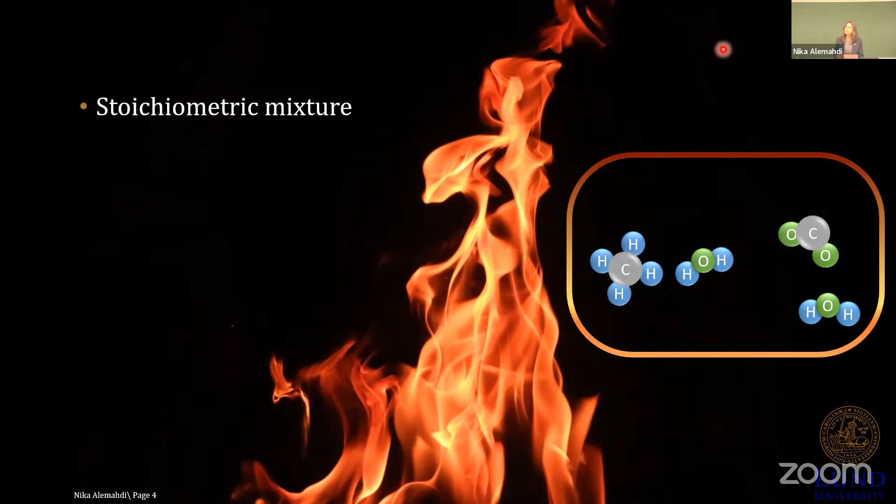The ratio of fuel to air is described using the fuel-air equivalence ratio, or phi, which is included in the title of my thesis. The fuel-air equivalence ratio is the actual ratio of fuel to air inside the combustion chamber, divided by the ratio of fuel to air in the stoichiometric mixture of that specific fuel.

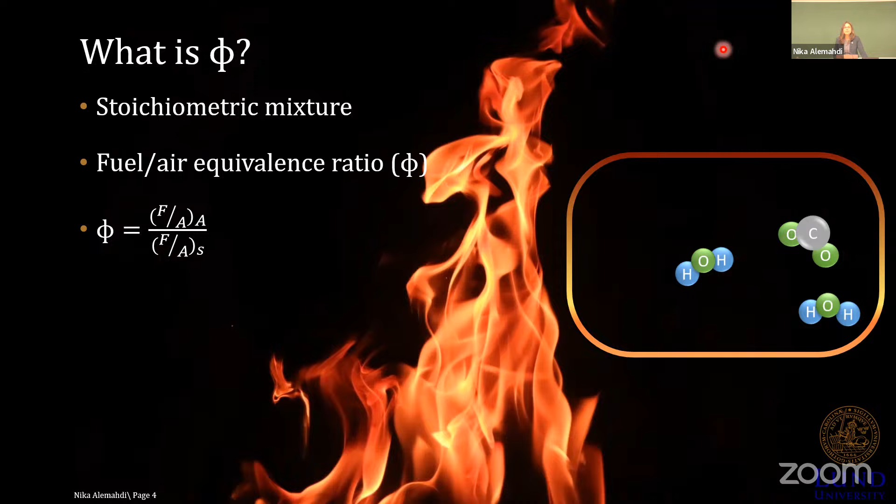Using fuel or fire, human beings have damaged and transformed nature a lot. But the effect of fire on the environment is not the only thing we as humans have done to nature.

Our beautiful planet has 9 health indicators, so-called planetary boundaries. Those are something like blood pressure or body temperature for us humans, to make sure that we are healthy or not.

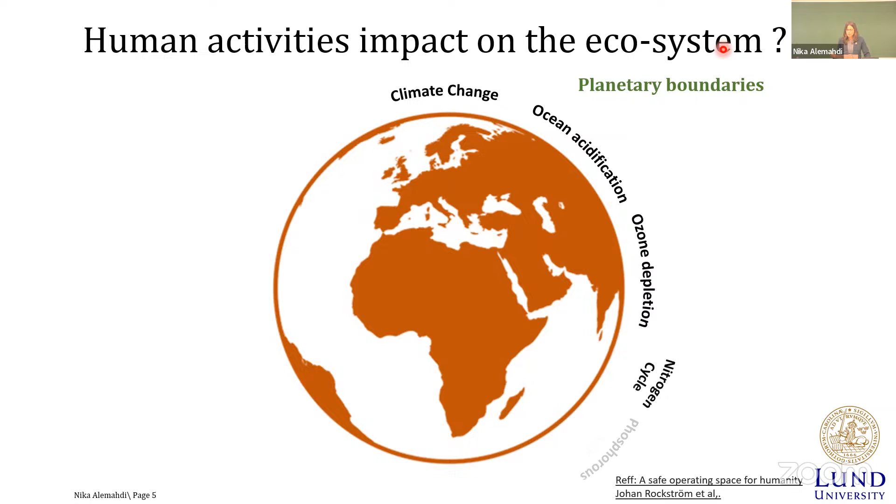I'm sure you have heard of climate change, which is the most famous planetary boundary. And of course we have the rest also here. We have 5 different levels for those planetary boundaries.

The first 2 are the safe levels. It means if changes happen during the first 2 levels, the ecosystem and the planet can adapt to the change and doesn't get sick. But if the damage exceeds these first 2 levels, the ecosystem and the planet will feel ill, and it's not a normal ecosystem anymore.

All human activities, from agriculture to burning fossil fuels and mining, are contributing to damaging the ecosystem and pushing all of those planetary boundaries to their thresholds.

If I take a simple example, like the transport sector's contribution to climate change: we are burning fossil fuels, mining for rare battery elements, and even building infrastructure for transportation. All of those activities are pushing climate change to the threshold and making the planet sick.

But would it be possible to decrease the damage that our activities are putting on the planet and its planetary boundaries? Or would it be possible to at least maintain our activities within a safe zone that would damage the planet less? How will it be possible, how can we damage less, and which zone would be safe for us to be active in, safe for both humans and the planet?

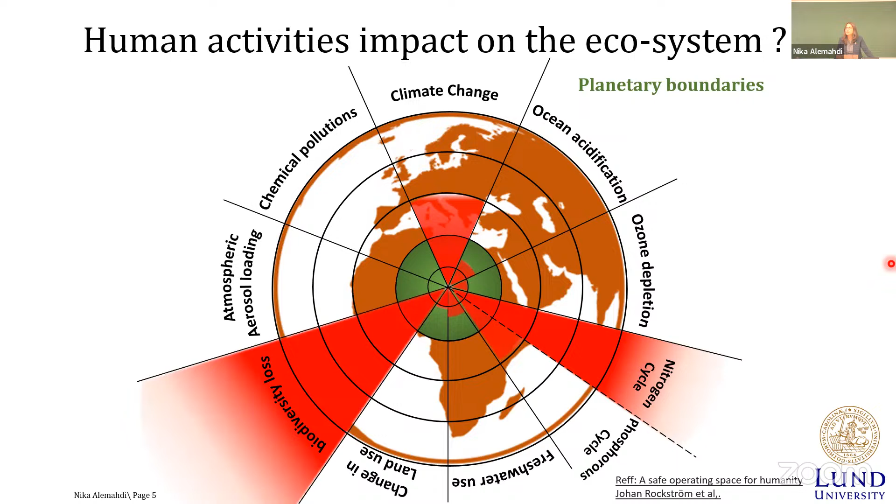Yes, actually there is a safe zone, and we can decrease these damages and keep it within a safe zone for both the planet and humans. And this safe zone is actually here within a donut.

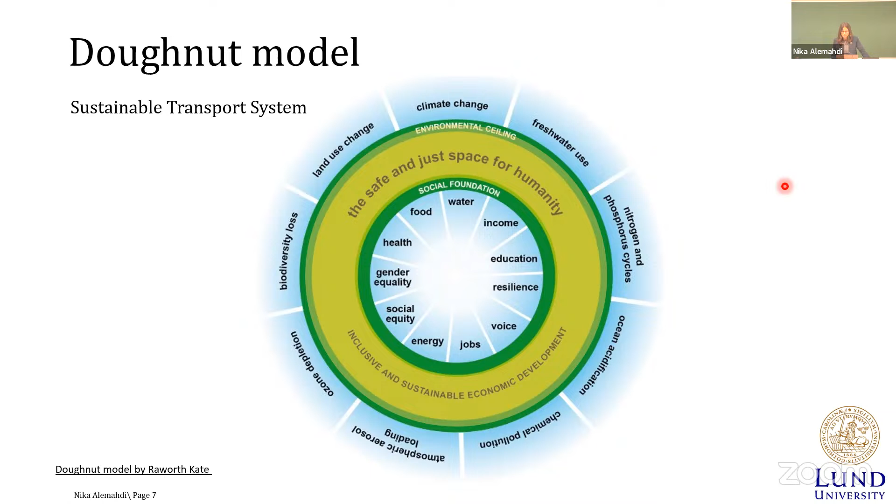Let's start with what I have learned. I knew that resilience is vital for any sustainable system, and diversity is a key factor for resilience. When it comes to passenger cars, diversity means we must have a fleet with different kinds of powertrains.

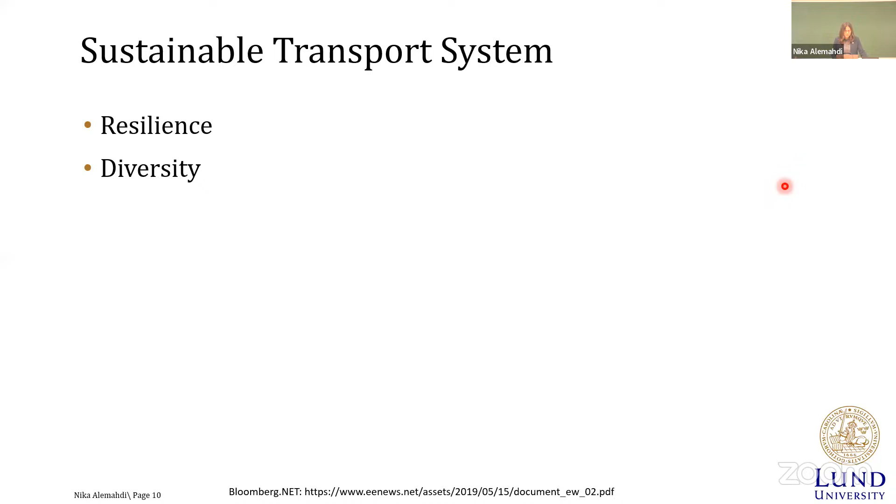I believe that with such a significant share in future transportation, internal combustion engine technology has the potential to be used as an enabler for a sustainable transport system, helping us transition towards sustainable transport.

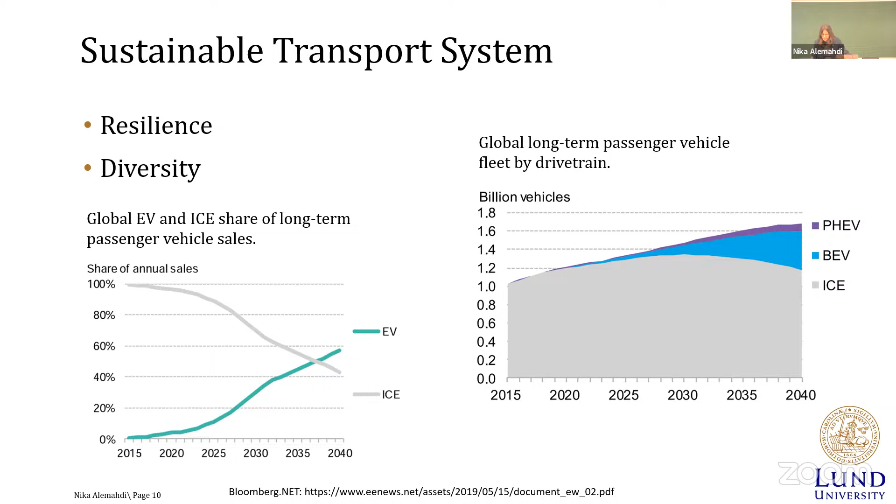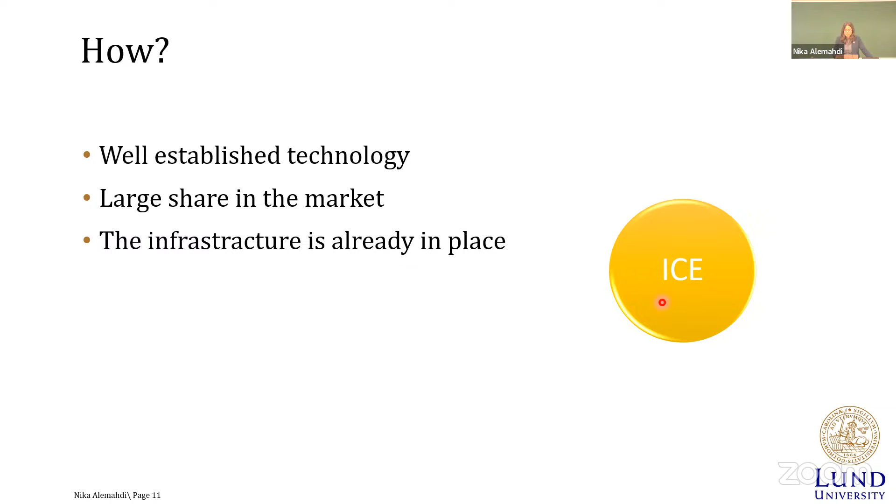But how should we use the internal combustion engine as an enabler? We know that internal combustion engine is a well-established technology, and we saw in the previous slide that it has a large share in the market. We also have the infrastructure already in place. But there are also some small challenges, like we need to increase the efficiency of internal combustion engine further. We need to decrease the emissions, and we need to replace fossil fuels with renewable fuels.

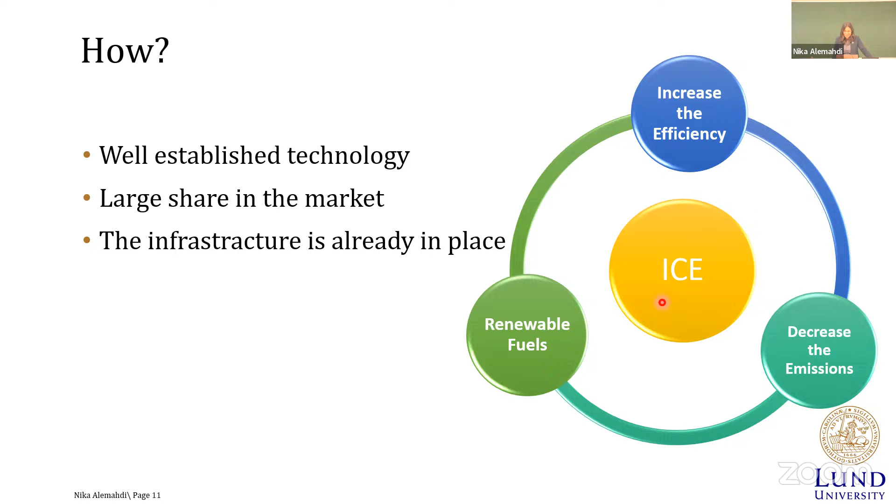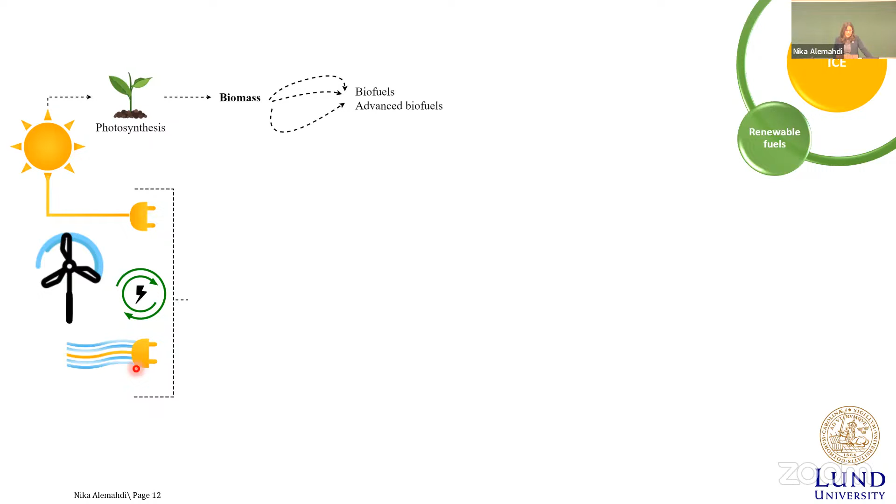Let us start with renewable fuels. Directly from sun, here we have biomass. And from biomass, using different pathways that sometimes are not that simple, we can produce biofuel and advanced biofuels. The other way is using electricity directly, and using different pathways that are sometimes complex and not always straightforward, we produce electrofuels or advanced biofuels.

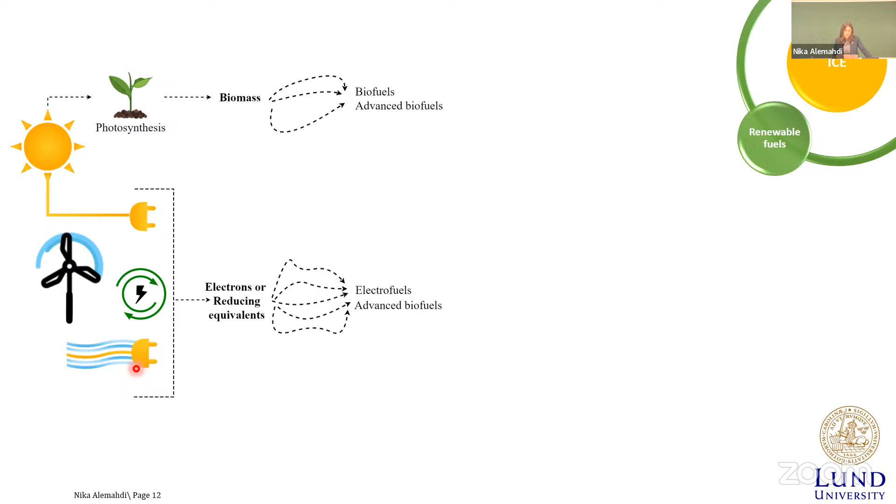I have an interesting plot here, from McKinsey Global Energy Perspective. This graph talks about different scenarios about future demand of sustainable liquid fuels. The main scenario that I want to talk about is this one. This scenario basically says that if we aim to maintain the temperature increase of the planet below 1.5, based on the Paris Agreement, then we need to increase the share of sustainable fuel in the energy sector up to 40%. Then sustainable fuel or biofuel is not just an option anymore or a maybe, it's a must.

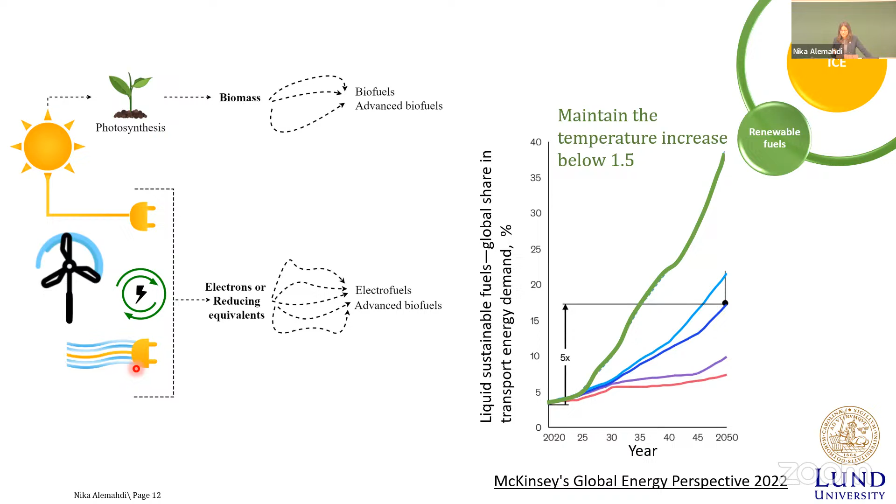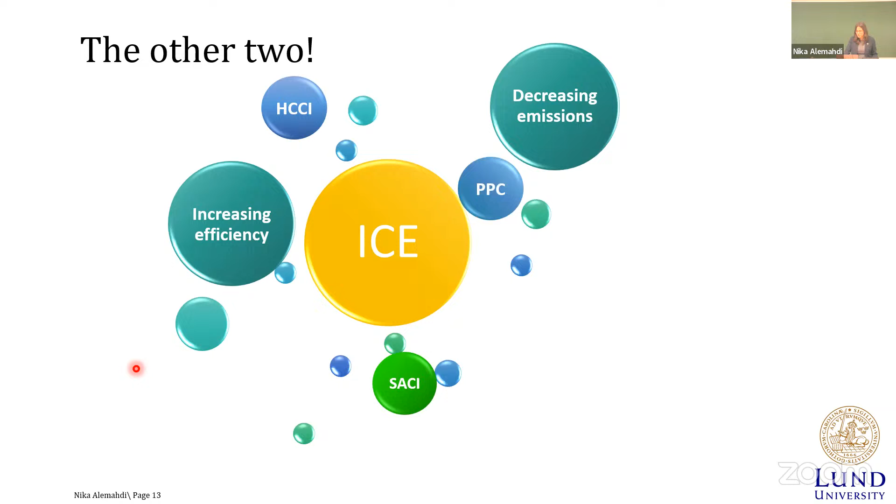But what about the other two? We need to decrease the emissions and we need to increase the efficiency. We have some combustion technologies that have these two properties, something like homogeneous charge compression ignition engines, spark assisted compression ignition engines, or partially premixed combustion engines. All of those technologies are working based on a concept called LTC, low temperature combustion concept.

Low temperature combustion concept is interesting because it has low emission and high efficiency, but it also has some drawbacks. As an example, it has a high pressure and low temperature of unburned gas. Therefore, we cannot use the conventional test methods like RON or octane rating for the fuel that we want to use for LTC. They don't work there anymore.

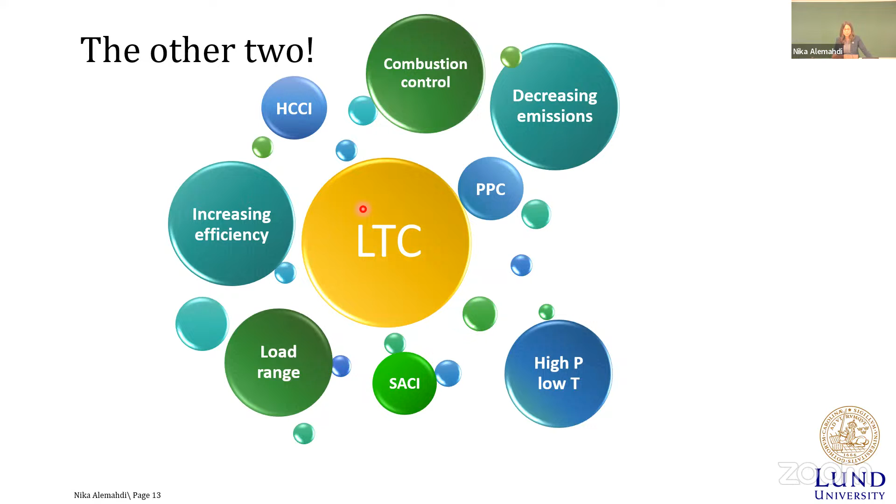Some of the LTC concepts or technologies also have a really limited load range, like HCCI. And we also face some controllability problems when we work with the LTC concept.

But these concepts and technologies are very sensitive to variation of phi, meaning variation of fuel to air ratio. They are sensitive if you add more fuel or less fuel. Being sensitive to variation of phi means that different fuels with the same RON number can still have different phi sensitivity and can have different responses in LTC combustion. This is another reason that we cannot use the conventional test method for evaluating fuel for low temperature combustion.

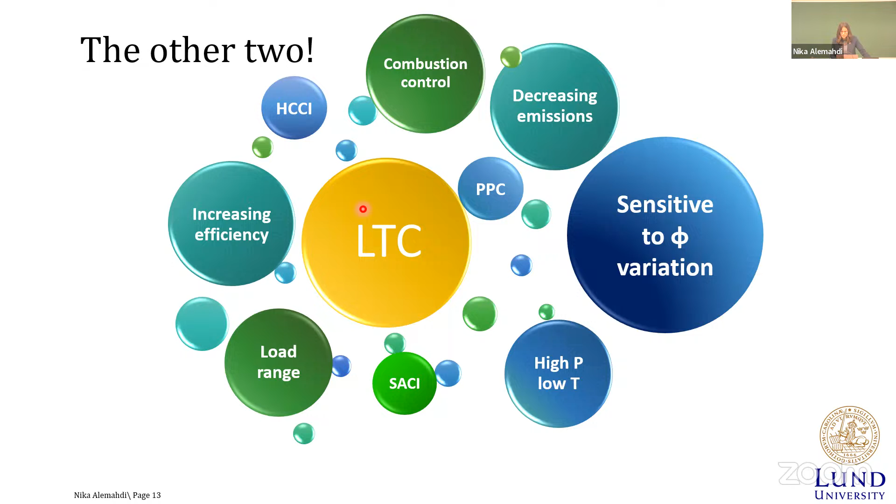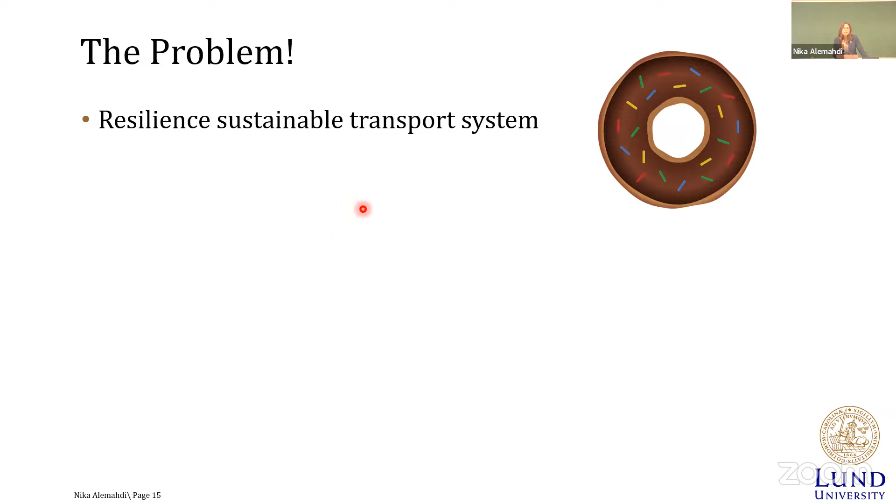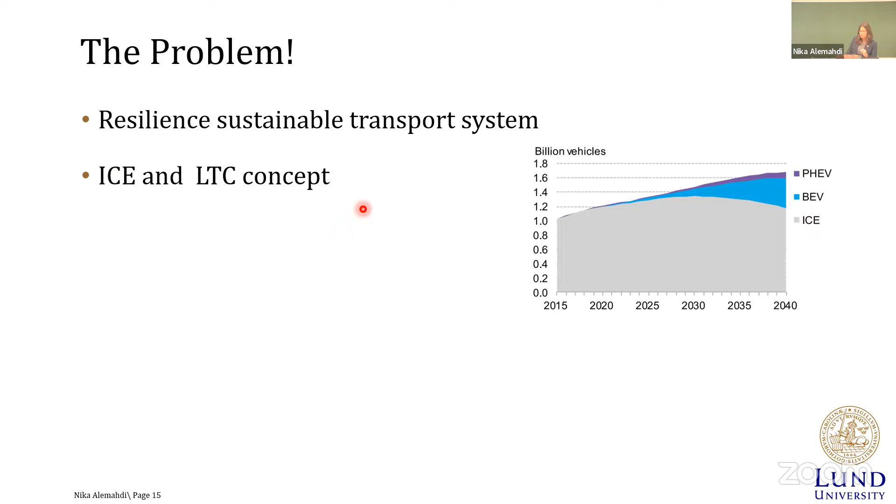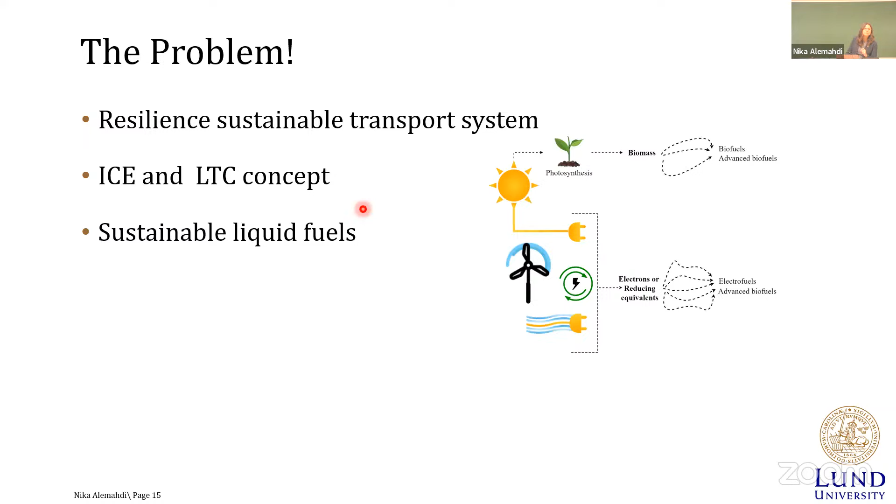But what was the problem? If I want to summarize the problem, cut the long story short: I knew that we need a sustainable, resilient transport system. I knew that we have internal combustion engine well established, already in place, with a large share in the future. We have LTC combustion as a low emission, high efficiency combustion concept with some problems. I also knew that we need sustainable liquid fuel in the future, and it's a must. So probably we will have that in place.

But the problem was how we should feed this new fuel that we have to the new combustion concepts that we have, because we don't have a good method, or an appropriate test method, to evaluate if it fits or not.

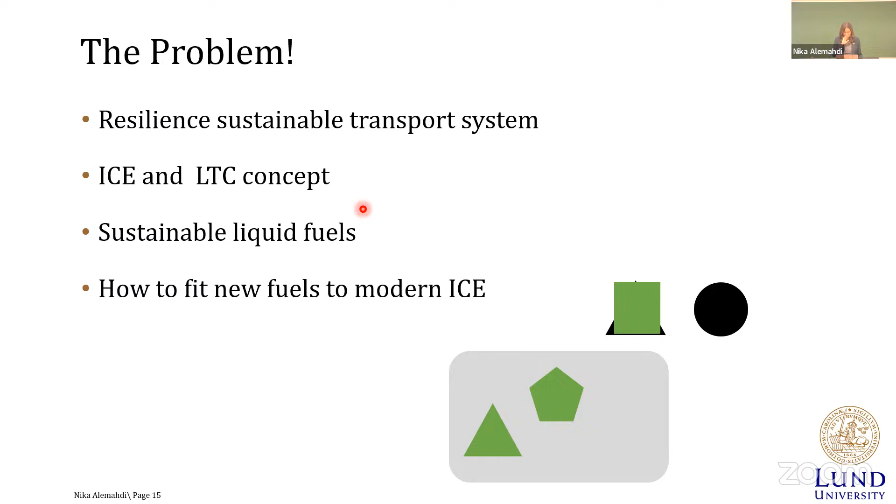Then to tailor fuel for LTC engines, we need a test method that can evaluate combustion response to different kinds of stratification, both fuel stratification and temperature stratification. The method also needs to be standard, so it should be possible for refineries or fuel producing industries to use that method. It should be rather technically simple, and it shouldn't be dependent on complex prerequisite data such as kinetic mechanisms, because those are not always available.

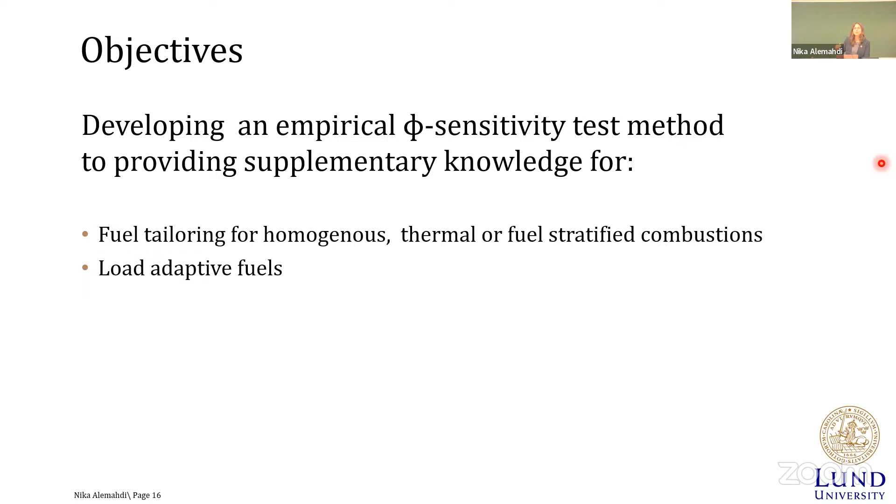And I believe that if we can develop such a method, it can support the transition of the transport sector towards sustainability by providing supplementary knowledge for tailoring fuel, preparing fuel for homogeneous modern combustion, thermal or fuel stratified combustions, and also load adaptive fuels—the kind of fuel that can tolerate different kinds of load with minimum combustion instability based on the combustion concepts.

And then this method may also give us some information about how to design a controller strategy for low temperature combustion, and also give us valuable information about knock resistance evaluation of fuel for SI engines.

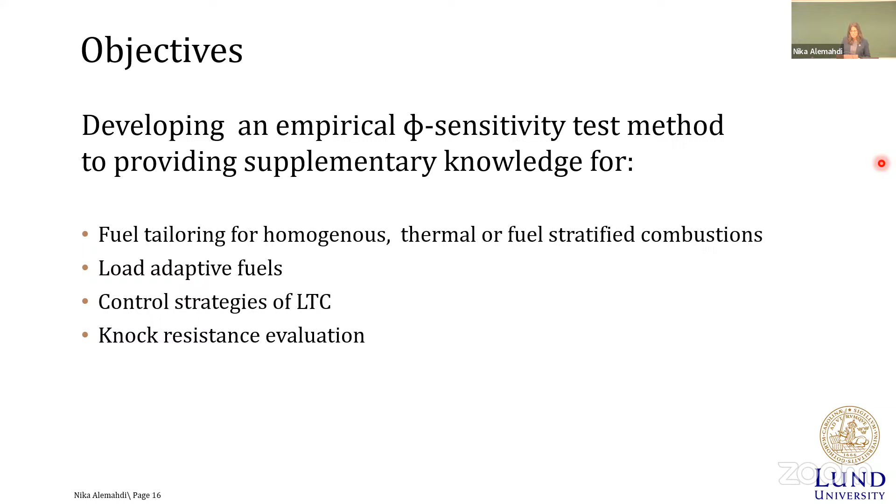But what did I have?

Yeah, I had access to this beautiful engineering masterpiece, an adorable CFR engine. This is a standard test engine, not one you see normally on a car. It was developed long ago for determining the octane rating of fuel.

Because it has variable compression ratio, it's versatile for burning almost every liquid fuel. The CFR engine we had in Lund is normally equipped with a spark plug and is a spark ignition engine. But at Lund University, we modified this engine for HCCI combustion because we wanted to do auto-ignition studies.

You see some of the specifications of the engine here. It is a single cylinder engine, and it has variable compression ratio from 4 to 18. These are, I think, the most interesting things about this engine, but we have modified it for HCCI combustion.

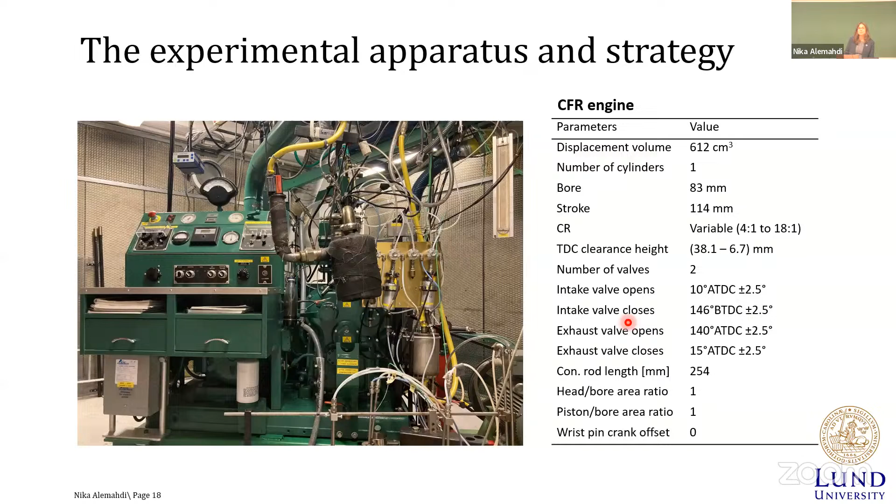But what is exactly HCCI combustion? Homogeneous charge compression ignition is a combustion technology that works based on a low temperature combustion concept. Inside the combustion chamber of an HCCI engine, we have an almost homogeneous mixture of fuel and air. It is like SI up to here, but then we don't have a spark plug.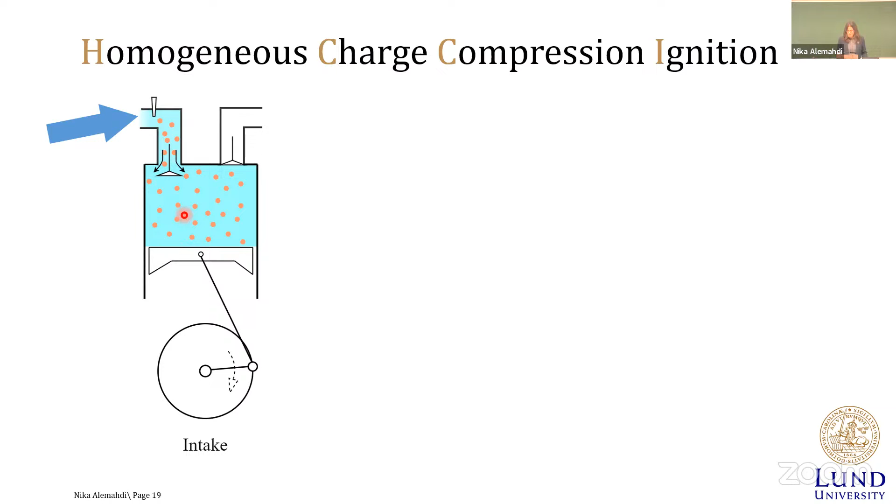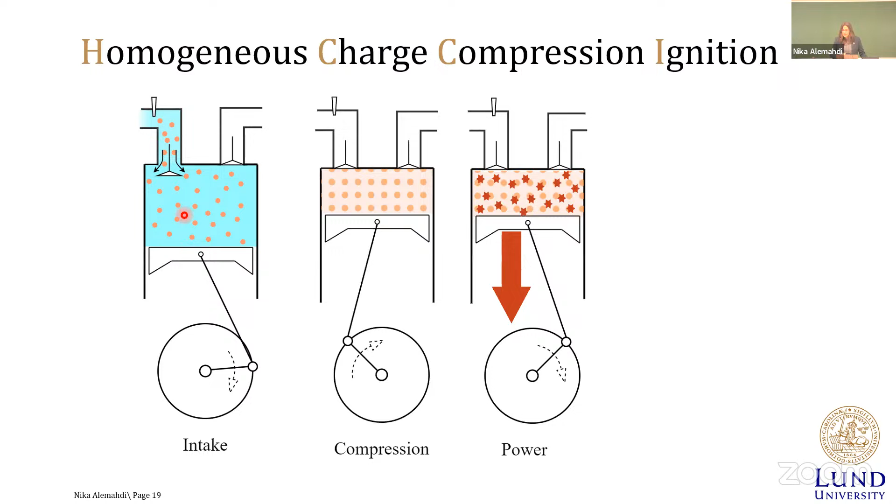But how do we burn it then? We compress a mixture of fuel and air to the point that it heats up and auto-ignites. Spontaneous auto-ignition starts throughout the whole cylinder in sequence, not all at once, and generates power. Then, like any other engine, we push the exhaust gas out. This is how HCCI technology works.

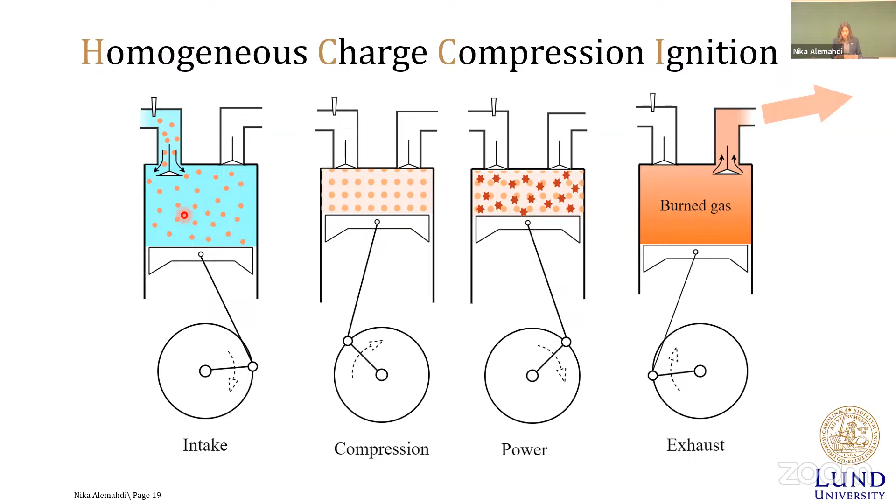Let's come back to the test cell. In the test cell, as I explained, I had this masterpiece, and I also had a sample line to the HORIBA emission analyzer for measuring different emissions, and also calculating phi, lambda, and oxygen from the emissions.

I also had a data sample line to a data acquisition system, to take readings from different sensors and measure and save different parameters of the engine for post-processing.

The general strategy of my research, my experiment, was that I had 3 different intake temperatures: one 50 degrees Celsius close to RON measurement temperature, 150 close to MON temperature, and one in the middle.

And then the intake pressure was ambient. The coolant temperature was set based on RON and MON, because I'm using the CFR engine, which is designed for this method, so to keep it standard. For different experimental campaigns, I had the CA50 constant at different levels, like 3, 6, and 8, and compression ratio was variable.

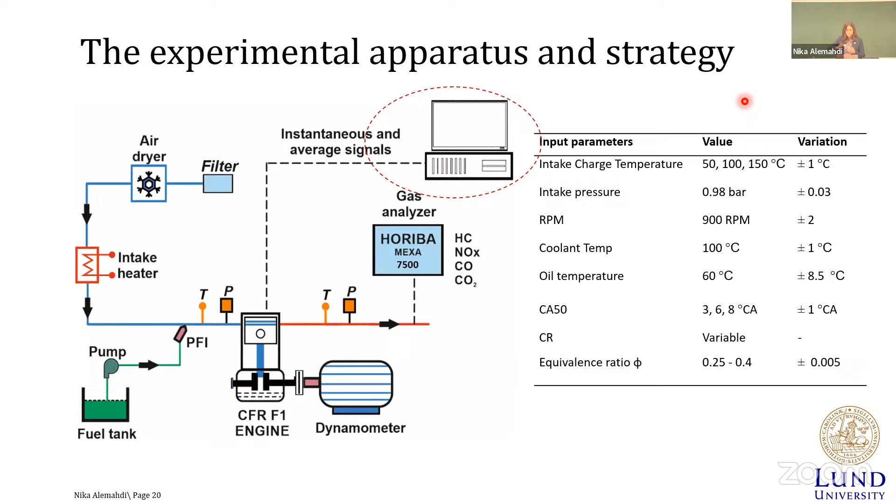Then, after selecting that criteria, I evaluated the method using some extreme fuels. I will talk later about what I mean by extreme fuels.

Then, when I got the results or data, I checked if they are sensitive. It means, if I change the phi, do I really see any changes in the result parameters or not? Is it consistent? How much is the error? Can we rely on this data?

If we do the experiment on different days, do we get the same result? Is it transferable? Can we use this method for designing fuel for a conventional engine? Would it be possible to benefit from this result in a conventional engine? Because, as I told you, the CFR engine is a test engine.

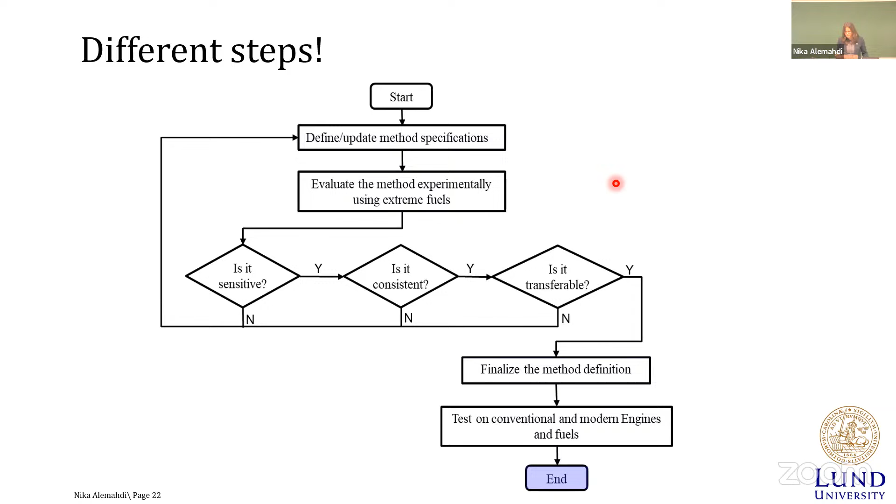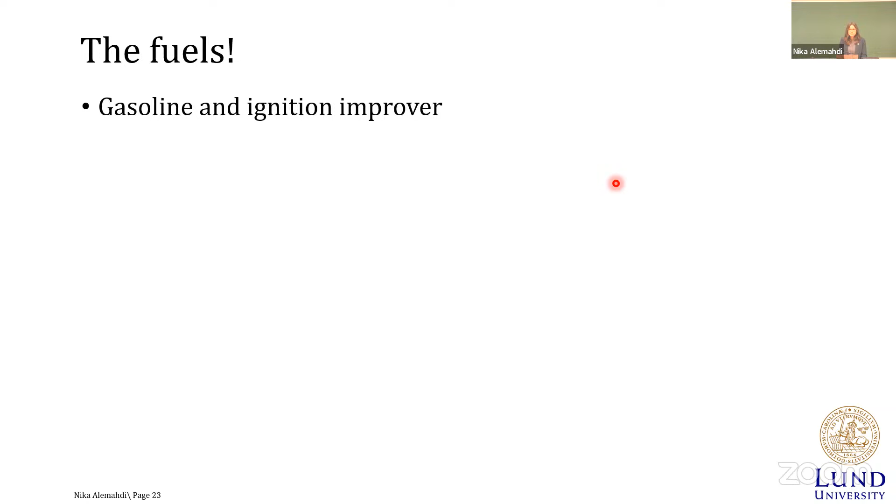But what kind of fuel have I used? For preliminary studies, I used gasoline and ignition improver. I also used different reference fuels at 3 different RON groups of 63, 84, and 105 octane number. These are the extreme fuels that I will talk about more. I also tested neat ethanol, neat isobutanol, and neat N-butanol.

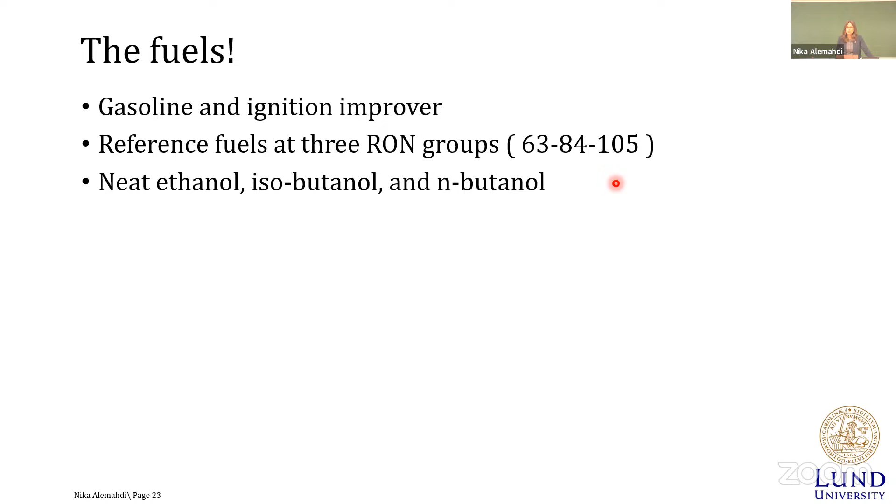I also evaluated the blend of isobutanol with the reference fuel. But let's just have a closer look at the extreme fuels.

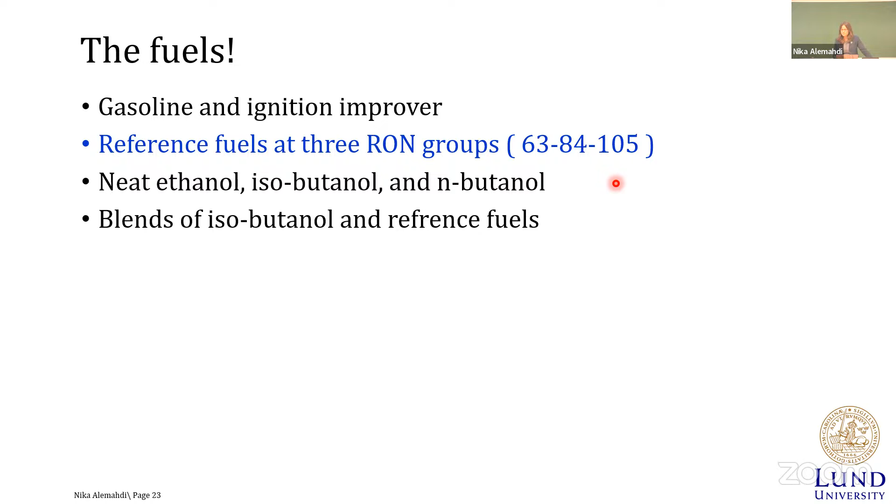Here you can see the fuel matrix that I developed for my experiment. I had these 3 base fuels. I selected these 3 base fuels first: ethanol, the highest RON number and highest oxygen concentration, no aromatic; PRF 84, a middle RON fuel; and PRF 63, a very low RON fuel.

Based on those baselines of octane number, because I wanted to isolate the effect of octane number from Phi, it was important for me to have fuel in each group with the same RON number but different composition. In each group, I had fuel with toluene (aromatic), ethanol (oxygenate), and isooctane and N-heptane. I also had a fuel with no aromatic, only oxygenates, isooctane and N-heptane. And lastly, a fuel with toluene but no ethanol, with high concentration of aromatics but no oxygenates.

But how did I do it? We had an in-house model developed by Solaka Aronsson et al. You can see the link here. First, I estimated the volumes needed to achieve such a RON number using the model. And because models always have uncertainty, I sent it to the Saybolt company to measure the exact RON and MON number for me.

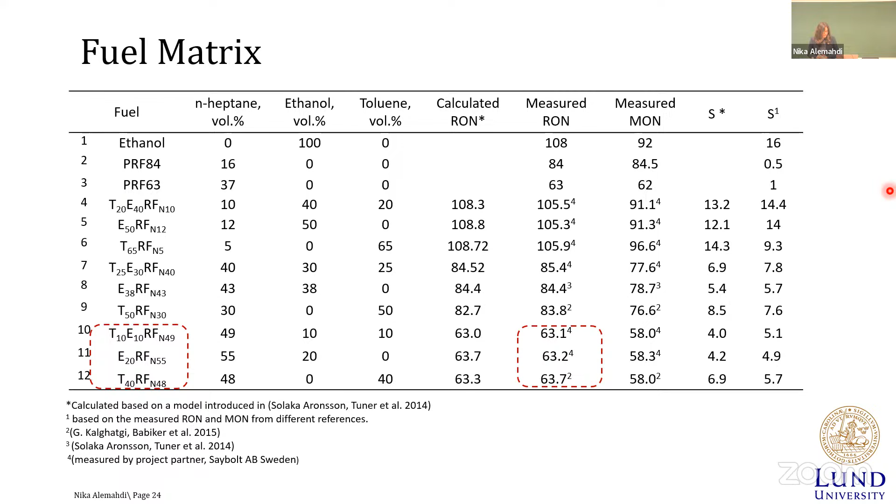I'm not the first one who has worked on Phi sensitivity, and I think I will not be the last one either. From the literature review, I learned a lot about Phi sensitivity.

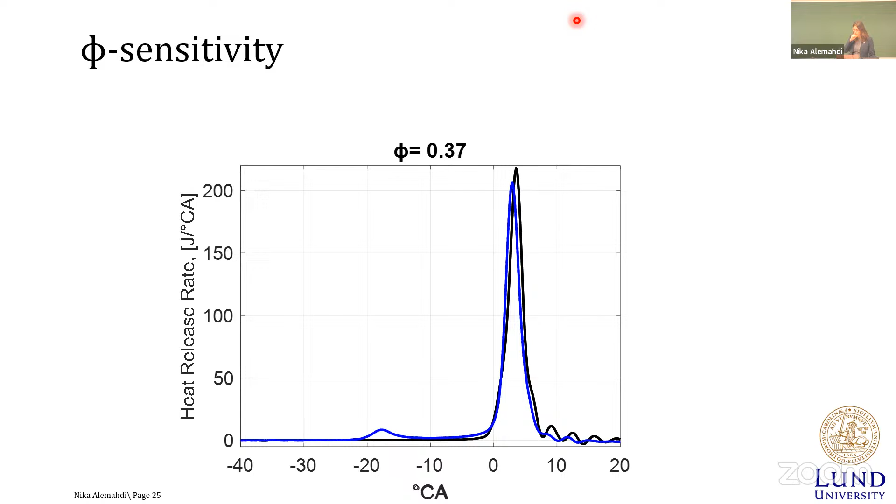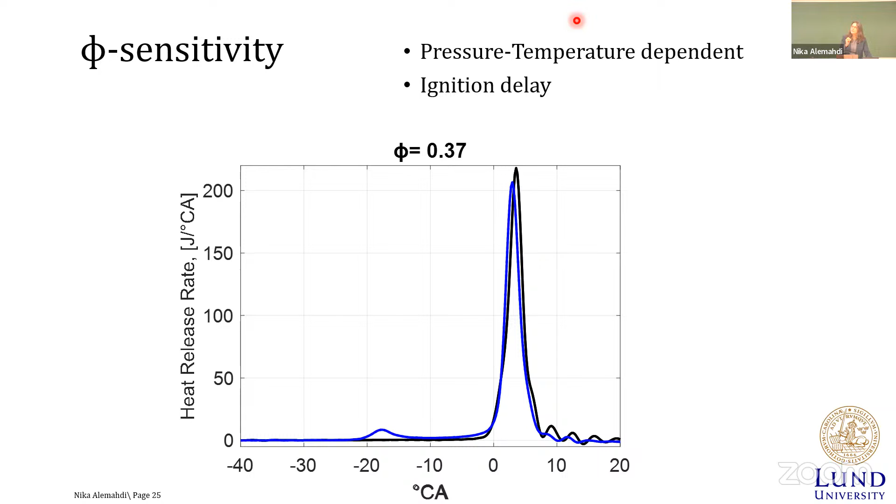I learned that Phi sensitivity is strongly dependent on the pressure and temperature inside the combustion chamber. I also learned that the fuel-air mixture with different equivalence ratios will show different ignition delay when we burn them in a combustion engine.

I also learned that heat release during the early reaction is an indicator of Phi sensitivity, meaning that a fuel with higher Phi sensitivity will probably also exhibit more heat release during the early reactions. There are some terms I think I need to clarify, like ignition delay, heat release, early reaction, and so on. So let's start with those clarifications first.

Here what you see is two heat release profiles for two different fuels. The black one is single stage combustion, and the blue one is two-stage combustion, both at the same Phi level.

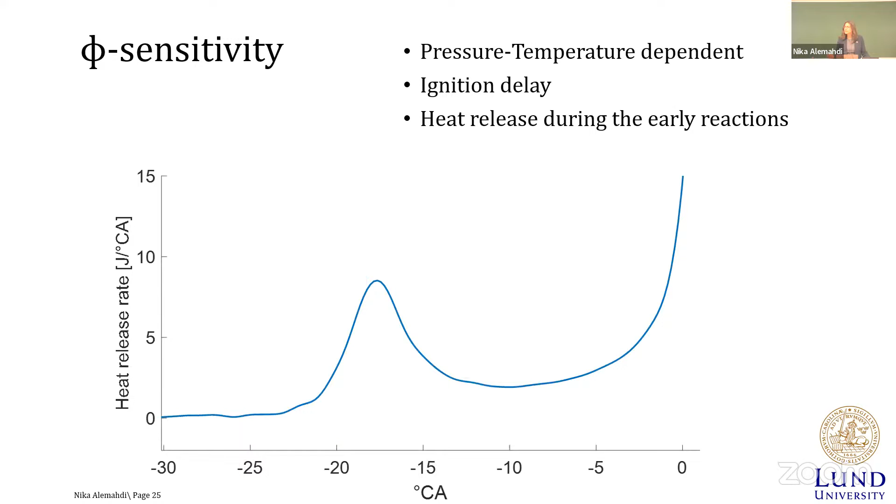If I zoom in to the low temperature reactions, or early reactions, let's start with this two-stage combustion. We need to define the start of autoignition. Based on my research and literature study, I selected 0.2 joule per CAD for start of autoignition, and 5 joule per CAD for start of main combustion.

Here, the bump that you see is the low temperature reaction. And the top of this bump, and the minimum of the low temperature reaction here - this gap is called NTC. The NTC zone is a zone where temperature keeps increasing, but less and less fuel burns. This minimum point here, the end of the NTC zone, would be the start of intermediate temperature heat release.

From start of autoignition to start of low temperature heat release, we have low temperature heat release and low temperature reactions. From start of intermediate temperature heat release to start of main combustion, we have intermediate reactions that also release intermediate heat. From start of autoignition to start of main combustion, we have ignition delay - the definition of ignition delay that I used in my work.

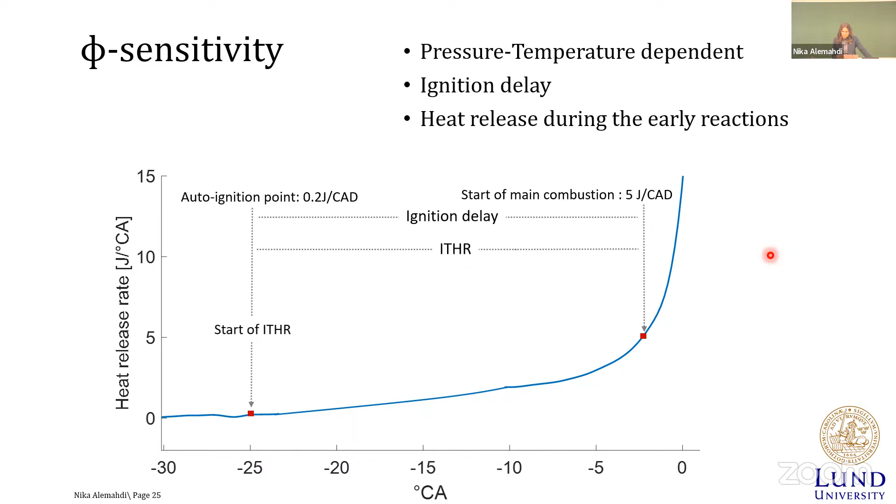Now we know the definitions that I have in my work. Let's continue with the bullet point. The first thing was pressure temperature dependency of phi sensitivity.

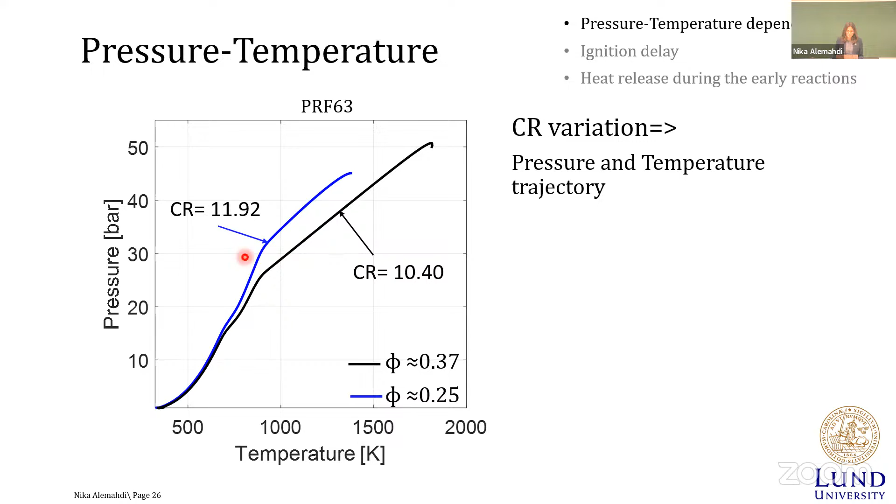Here we have pressure temperature trajectory graph for PRF63 at two different phi levels. You see that we also have different compression ratio. And by varying the compression ratio in the CFR engine, the temperature pressure trajectory prior to autoignition and generally inside the combustion chamber changes. Since we have different pressure temperature regimes when we change the compression ratio, and since HCCI combustion is kinetic driven, it is sensitive to this variation of compression ratio.

Therefore, by adjusting or changing the compression ratio in a CFR engine, we are changing the onset of different phases of combustion inside HCCI combustion.

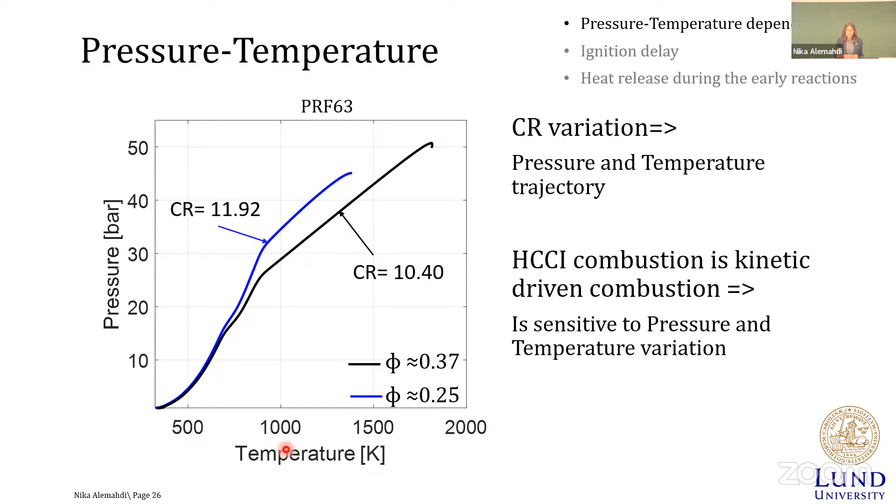But what about ignition delay? Here we have the early reaction part of PRF63 at different phi levels. We see there also different compression ratio. This is only one example of the data that I have.

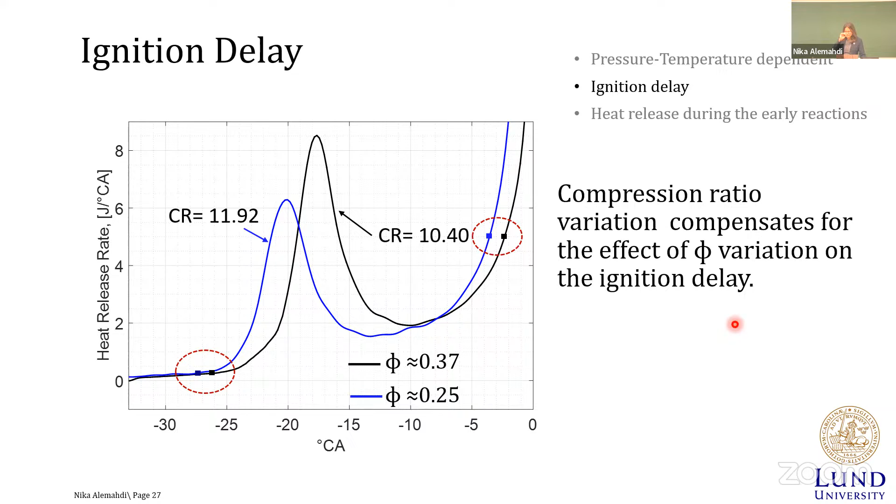I have adjusted compression ratio to maintain CA50 constant, and it seems that adjustment of compression ratio to maintain CA50 constant also kept the ignition delay constant. So it means that it compensates for the impact of phi variation on ignition delay.

You see that we have almost the same ignition delay at different compression ratios at different phi, because when I was changing the phi, I adjusted the compression ratio to have a constant combustion phase.

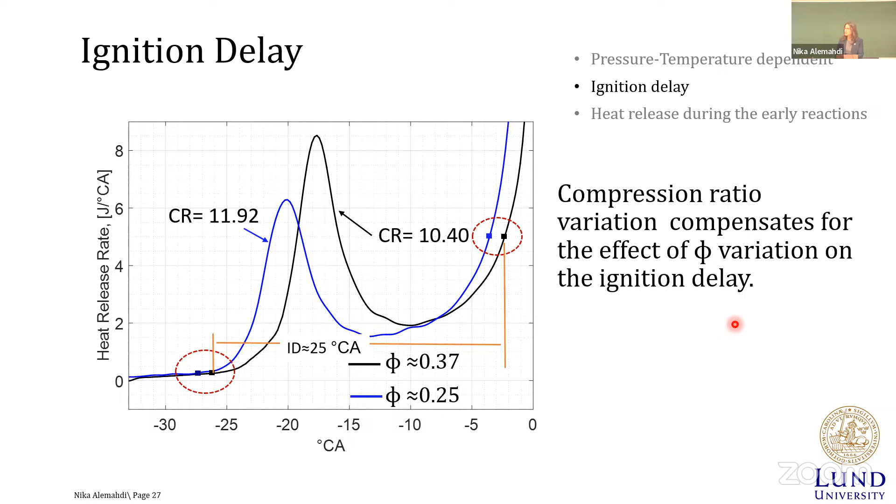But this is only one of the few. I have normalized ignition delay to be able to have a better understanding of the rest of the fuels. This is the scaled up bar chart that you see here. The normalization was basically that I measured the change of ignition delay, the ratio of ignition delay change to the phi variation.

You see here we have different RON groups, and the variation of ignition delay, or the normalized ignition delay, is less than 0.01%. If you compare it with the ignition delay of 25 crank angle degrees that we had, it is far less than the standard deviation of the ignition delay from the mean value. We can take it as zero. You even see that for those fuels it is actually zero, but the rest are also statistically zero.

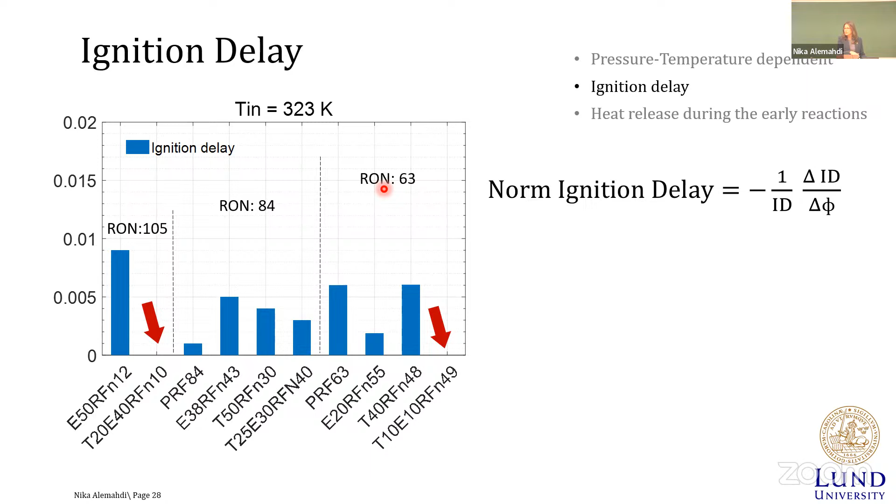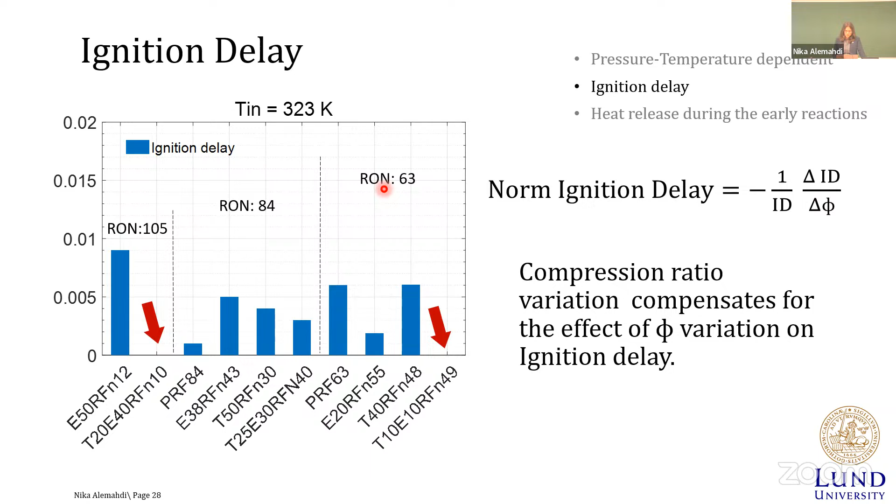Then with high confidence, I can say the compression ratio variation compensates for the effect of phi variation on the ignition delay. But what about the heat release during the early reaction? I told you that in the literature they say when the heat release during the early reaction is higher, then the phi sensitivity is higher.

In this plot here, we see different RON groups and different heat release during the early reaction, both intermediate and low temperature heat release. And if I bring the normalized compression ratio here and plot it...

I see that there is correlation between the amount of heat released during the early reaction and the normalized compression ratio. There was no correlation between this heat release and ignition delay, as we saw in the previous slide. And there is also no correlation between this heat release during early reaction and auto-ignition temperature, because the auto-ignition temperature of HCCI combustion for different phi is in such a narrow range that it's not statistically significant, based on both literature review and my personal work.

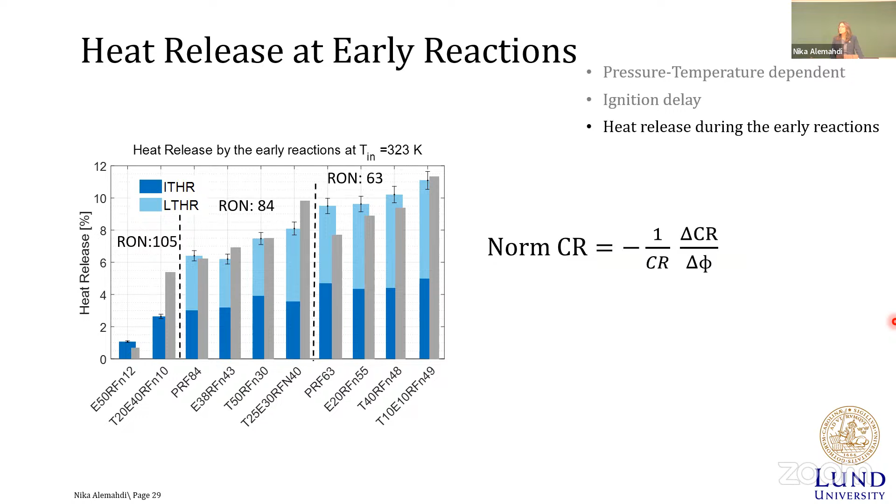Looking at this graph, when we normalize the compression ratio and compare it with heat release during the early reaction, we notice that there is a clear link between heat release during the early reaction and normalized compression ratio. Then would it be something to be used as a method definition? Seems yes.

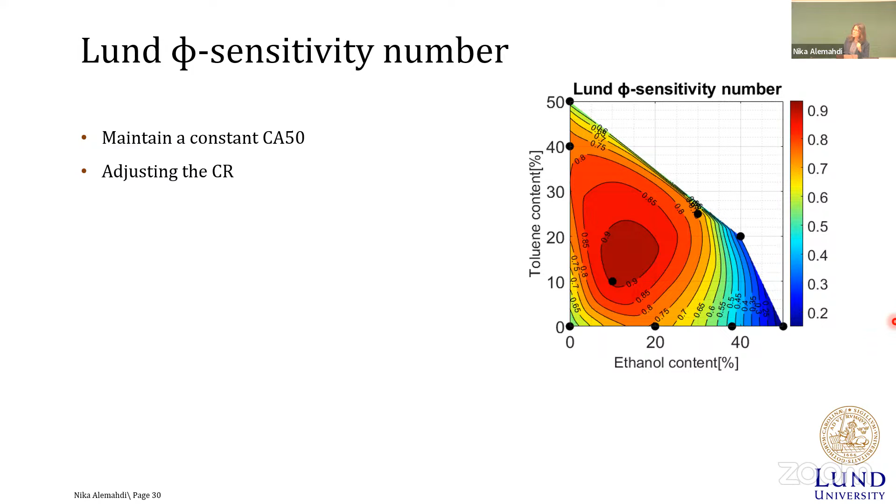If we want to maintain a constant combustion phase by adjusting compression ratio for different equivalence ratios of one single fuel, then the compression ratio variation would work as an indicator for phi sensitivity. And here is the formula for the Lund phi sensitivity number, what I have called it.

It's important to know that different fuels with the same RON number can still have different phi sensitivities. If you look at this graph, I have plotted the variation of phi based on fuel composition. We see that when the ethanol concentration increases, first we have an increase in phi, and then the phi sensitivity decreases. Toluene generally increases the phi sensitivity,

and we need a very high percentage of toluene to see any decrease in phi sensitivity. This percentage is not allowed because the highest percentage of aromatic in gasoline is 35%. That was just for test and experiment, so we will end up here. It means that adding ethanol, adding toluene, within the percentage that is allowed, would always increase the phi sensitivity of the fuel.

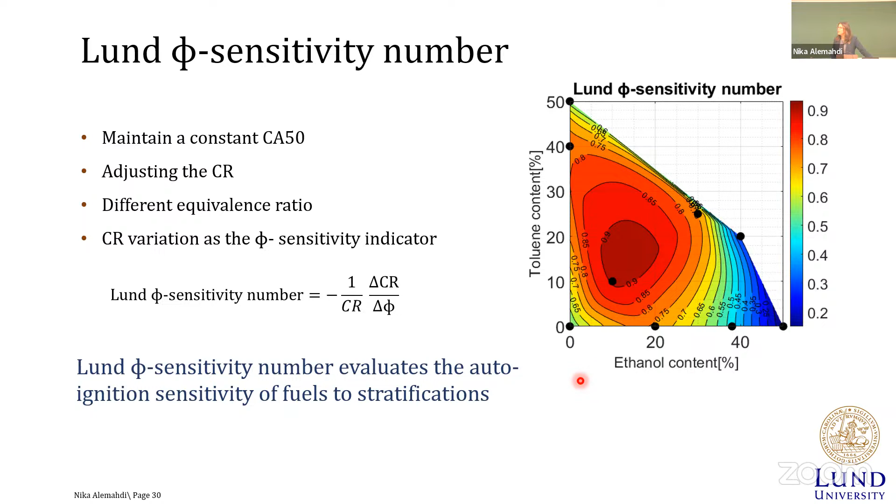We can measure it at different intake temperature. We don't need to stick to a specific intake temperature. It depends on our need. But then you cannot compare fuels that you have measured the phi sensitivity in different conditions together. You should compare the fuels with the same intake parameters, input parameters.

You can also measure it at different combustion phasing. It doesn't mean that it must be always at 3. It could be any combustion phasing before 8, because then 8 is too late and its combustion is very unstable, as my data shows. But then for any fuel, different fuels must have the same combustion phasing if you want to compare them.

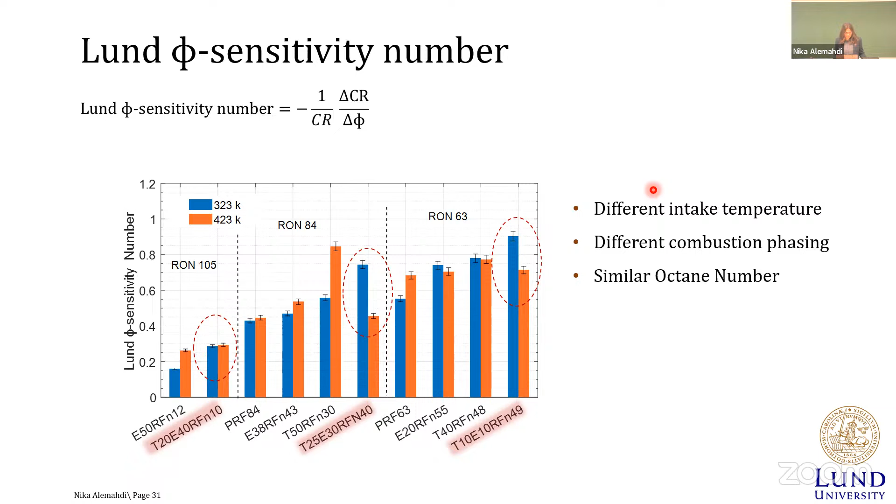And the phi sensitivity of it decreases. It shows less variation of ignition delay when we test it at higher intake temperature. That might be some option for some engines that need to work at different temperatures and still get, just have different output.

But now I want to explain what it means exactly when we say a fuel has high phi sensitivity, high Lund phi sensitivity, or low Lund phi sensitivity. High Lund phi sensitivity number, which is an indicator of high phi sensitivity of the fuel, means that the autoignition properties are more sensitive to phi variation. These autoignition properties could be pressure, could be temperature, could be ignition delay.

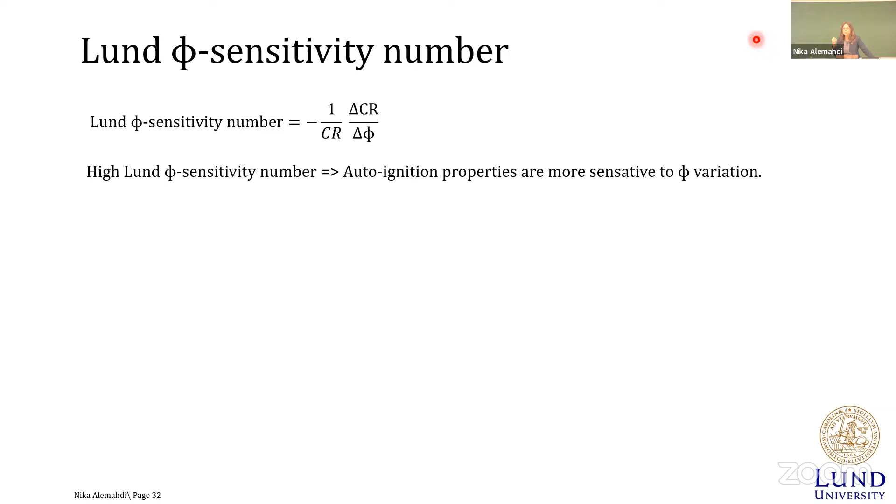And those kinds of fuel, if they have high octane rating, then they are suitable for homogeneous charge compression ignition engines, because you can compress it to high compression ratio and they can tolerate high compression ratio. But when they burn, they don't burn all at once. They burn in sequence. Different areas of the combustion chamber will start at a little bit of different timing. And this property will make the heat release more smooth instead of just having all combustion at once.

Also the same for a stratified combustion. We have a little bit lower RON number compared to HCCI here. But again, if we have high phi sensitivity, it means that the stratification will work better. So we have more smooth heat release and more sequential combustion.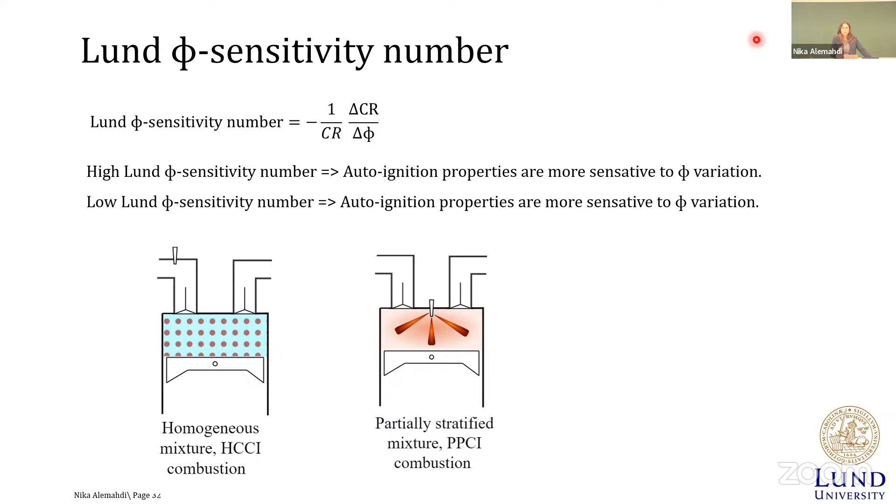It is not always nice to have high fuel sensitivity. Sometimes we must have fuel with very low sensitivity, like SI engine, because in SI engine we don't want knock. We don't want autoignition to happen somewhere we don't like, and we also want high compression ratio to increase efficiency.

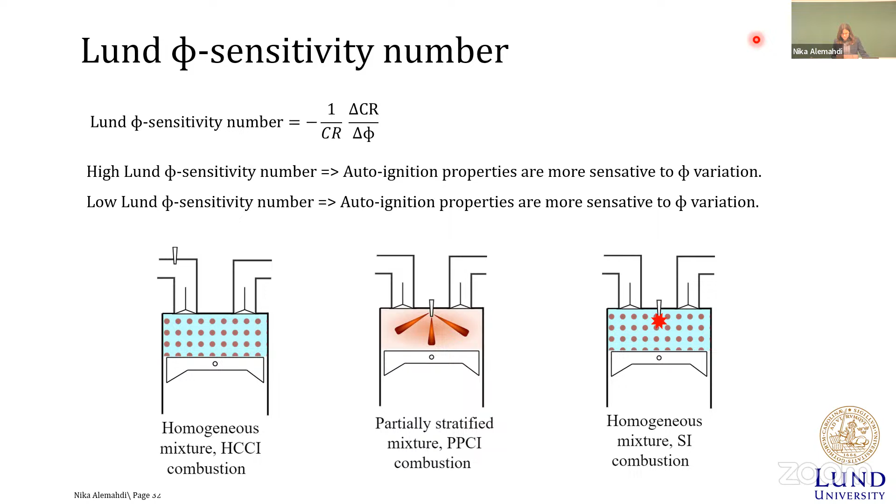So for a normal SI engine, spark ignition engine, we need a low Lund phi sensitivity number, because then autoignition properties are not sensitive that much.

What does this solution say? That was the proposal, a method I have developed to be able to evaluate fuel properties for low temperature combustion in a better way. But what does this solution say?

The Lund phi sensitivity test method is a platform to measure fuel sensitivity of new and conventional fuel in a rather technically simple way, which is possible to do in refineries because they all have CFR engines, and also in fuel industries. I have selected the standard condition of RON and MON tests.

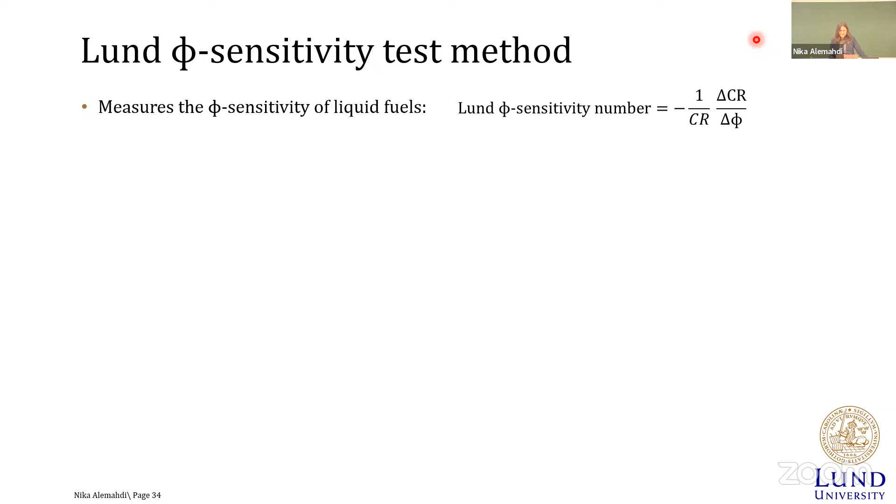This technically simple method would give us understanding of fuel for low temperature combustion and how to tailor them. Therefore, it can facilitate and enable the transition of the transport sector towards sustainability by providing knowledge about different aspects that I explained in a previous slide.

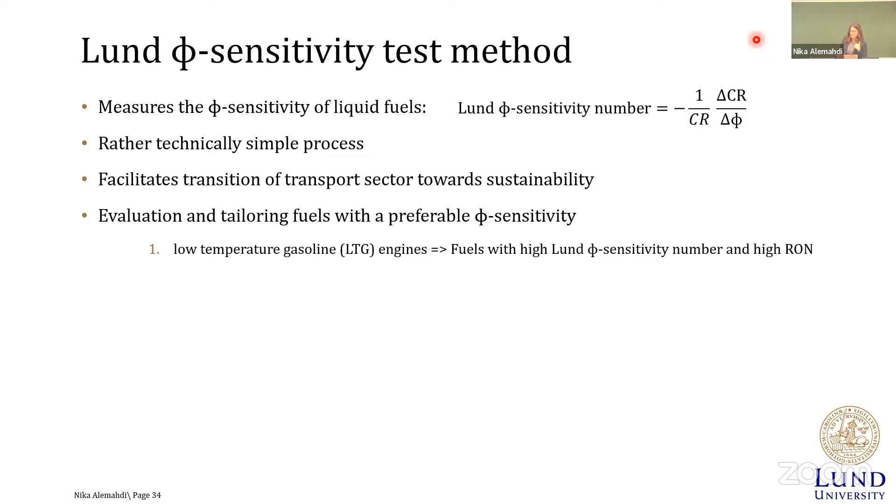For low temperature gasoline combustion, as I have explained, we need a fuel with high Lund phi sensitivity number and high octane number. For designing a fuel which is resistant to knock for SI engine, we need a fuel with high RON number and low Lund phi sensitivity number, as I have explained.

And for stratified combustion, we basically need high Lund phi sensitivity number and medium RON.

But there was also some knowledge that I gained during this experiment, and it is in my thesis, but due to the time limit I couldn't present it all here. This knowledge is about intake temperature and fuel composition effect on fuel sensitivity, about combustion phasing impact on fuel sensitivity, and about blending fuel sensitivity.

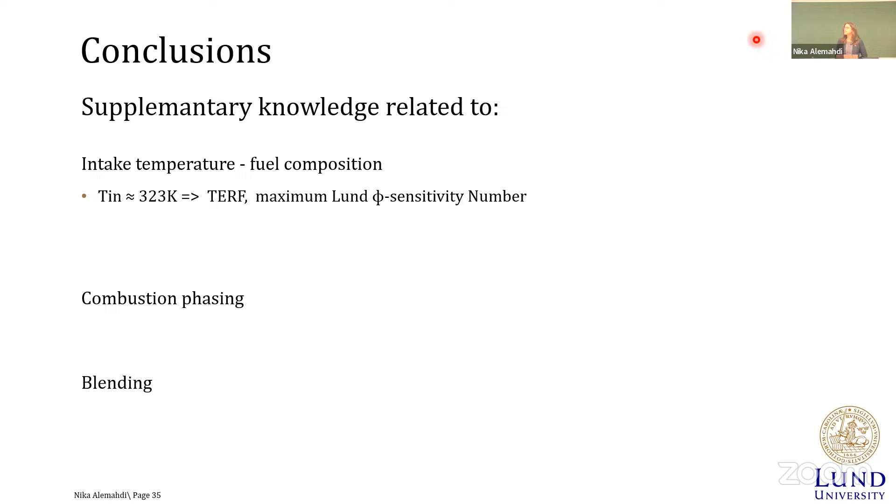At low intake temperature, fuel with toluene or aromatics and oxygenates will have maximum fuel sensitivity in the similar RON group. We don't compare fuel with different RON groups together. At high intake temperature, aromatic fuel without any oxygenates will show the highest Lund phi sensitivity number.

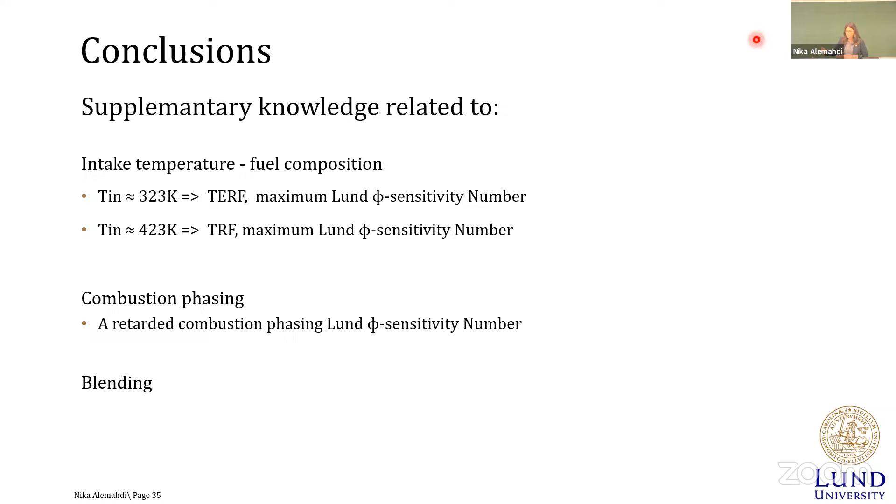A retarded combustion phasing decreases the fuel sensitivity of the fuel because it decreases the pressure inside the combustion chamber, and fuel sensitivity is pressure sensitive. Therefore, we will generally have a lower level of fuel sensitivity when we have a retarded combustion phasing for our test method. And for blending, when we check alcohol, we see that, similar to RON number, the blending fuel sensitivity number of the fuel is nonlinear.

What could be the option for future work? Modern engines today mainly work at high intake, or some at high intake pressure and boosted conditions. It would be really interesting to design some method for boosted HCCI and SI combustion. I have already written the method description, but there was not enough time during my PhD to finish that method.

Also, it would be really interesting and valuable to have a boosted fuel sensitivity evaluation. The fuel sensitivity evaluation I had was in a naturally aspirated condition. It would be valuable to have it in boosted condition to see the effect of boost pressure. And it would be nice to tailor some fuels based on the method I have developed here, and then test those fuels in a modern engine. That was actually part of the plan, but I didn't have time to do that.

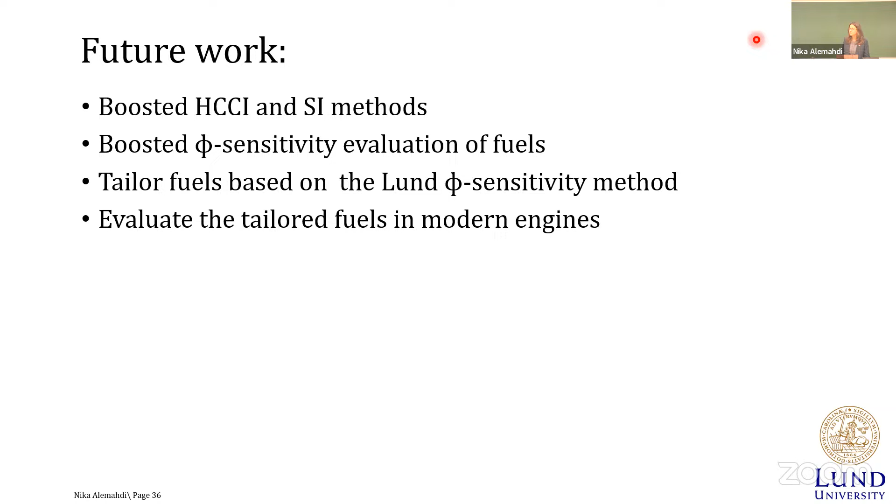Thank you very much.

Here or the previous one? Yeah, this one. You say with different temperatures, you got in both cases the maximum Lund sensitivity number. Yeah, but for different compositions.

The first one has toluene and ethanol reference fuel, but the second one doesn't have oxygenates. So the conclusion would be, no matter which temperature you have, the sensitivity number will show you the maximum value? No.

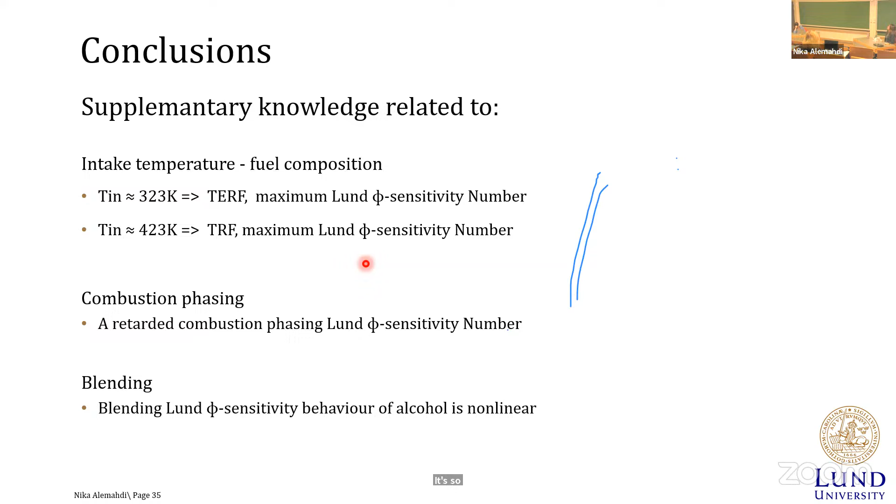This was not my intention. I want to say that at low intake temperature, in each run group, the sensitivity number is maximum for a fuel which has all 4 components. But at higher intake temperature, for each run group, the sensitivity number is maximum for 3-component fuels.

So if you were asked to choose just 2 conclusions from your work, which would be these 2 main amazing conclusions from your work?

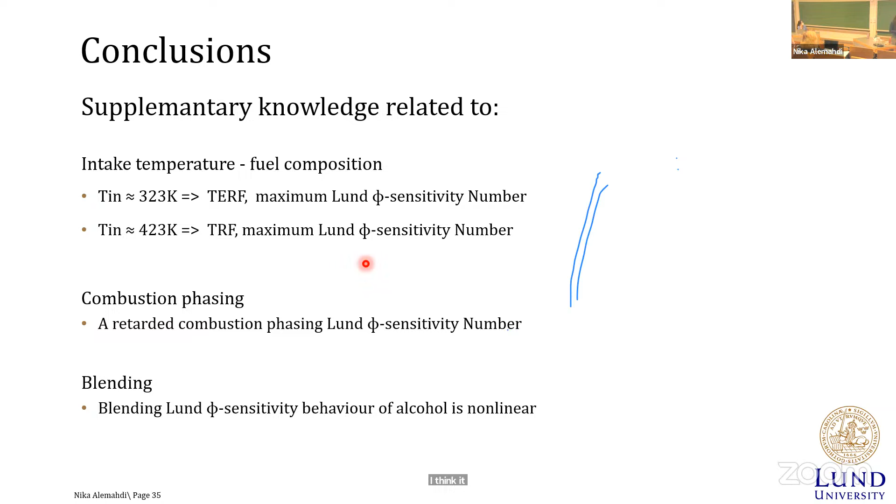I think I would choose from the previous slide, maybe this one. This 3, 1, 2, 3 - if I want to choose 2, then 1 and 3. No, 1 and 2. Okay. And the weak point of your thesis, what would it be?

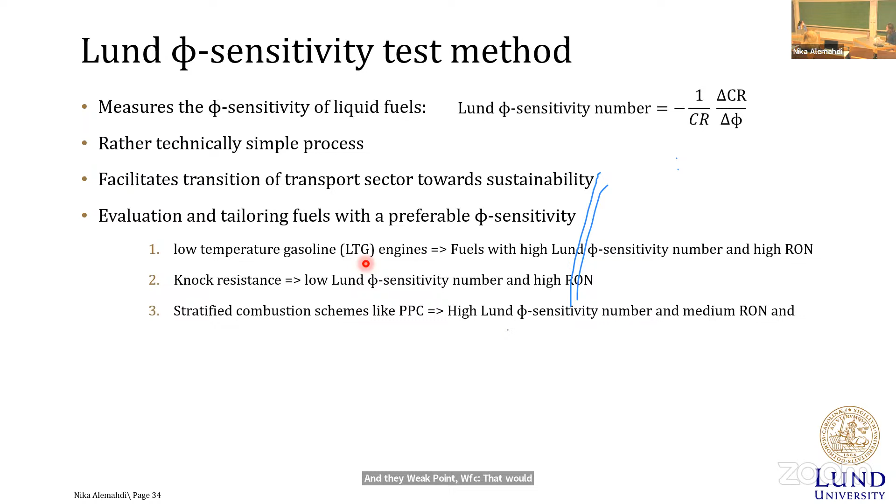I wish there was the technical possibility of having an extended range of phi. And also, I wish I had time to tailor some fuel and test it in other test cells with Volvo or Scania engineers, on the conventional engines that we have. Do you think your contribution could help relaunch these combustion engines?

Yeah, I think what I have explained and developed, of course, might not be perfect, but at least it's an opening for such a valuable and important property to be understood and measured by technical people in refineries.

So next time, if we use this method, it would be difficult to say, sorry, we don't have equipment to check if this fuel fits your engine or not. You should find a way to do it yourself.

But then it would not be the case. We can easily call a company like Saybolt that has a CFR engine in Sweden and ask them, would you please measure the octane number and also the phi-sensitivity of this fuel for us? We want to see if it fits your engine.